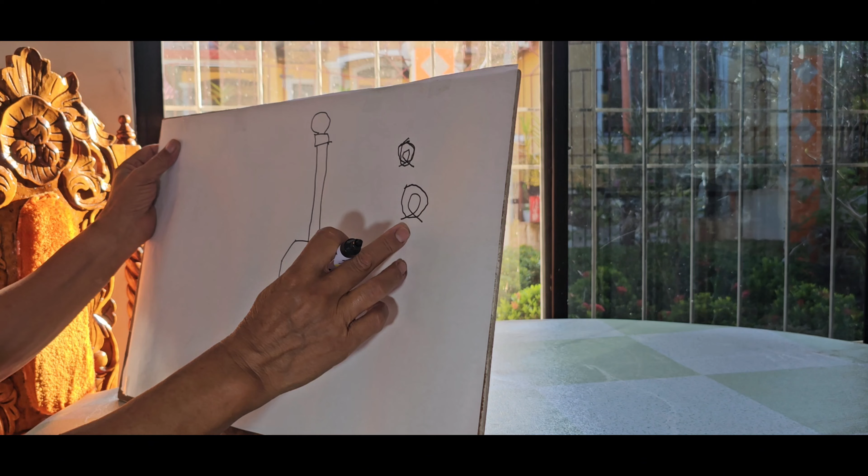Let's draw a bulb with two wires connected to it going to the junction box. This is the bulb. By the way, I used to draw the picture of the device for your easy understanding. In electrical plans, they do not draw this one. The bulb is drawn in a schematic symbol this way, a circle. This is the schematic symbol of the bulb in electrical plans. Then let's draw a switch.

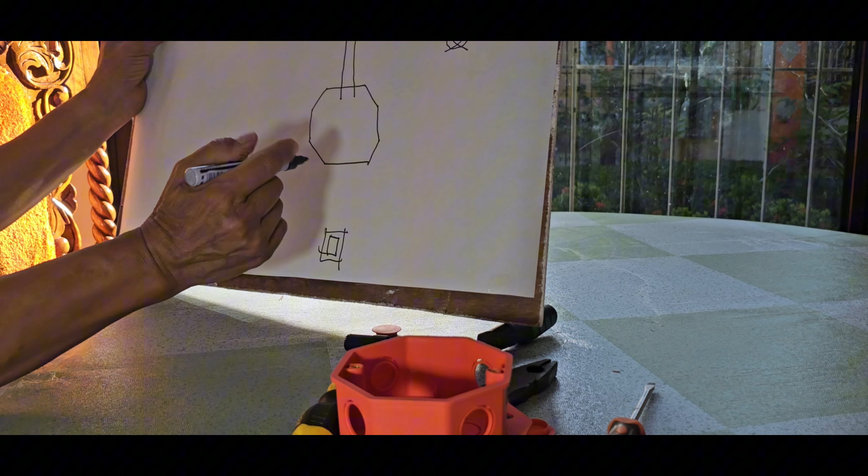Switch. This one, the switch. Then we have the wire going to the terminal of the switch. In electrical plans, they do not draw the switch this way. They just use the schematic symbol: a diagonal line, then a dot. This is the symbol of the switch in electrical plans.

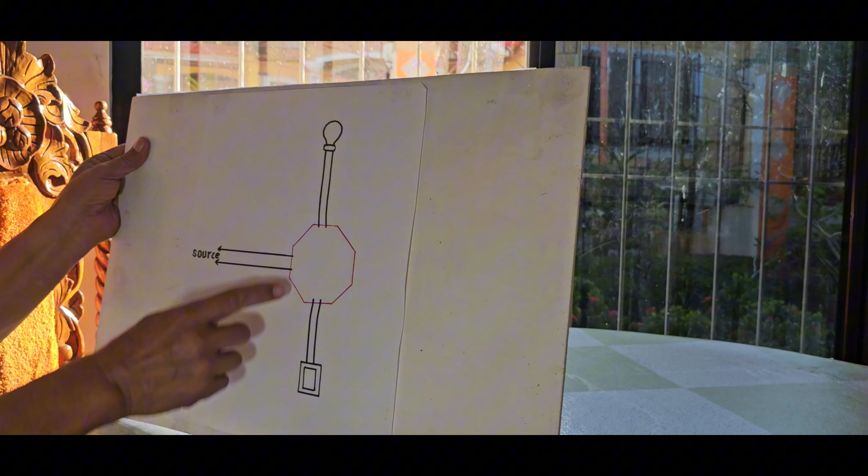Then we have the two wires going to the source. These two wires are to be connected to the source. So we have a bulb with two wires going to the junction box, the switch with two wires going to the junction box, and two wires to be connected to the source. Then how are we going to connect these wires in the junction box?

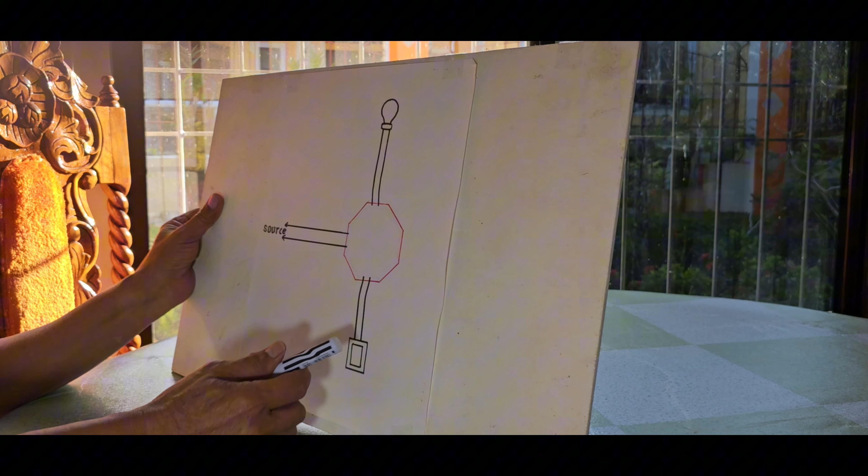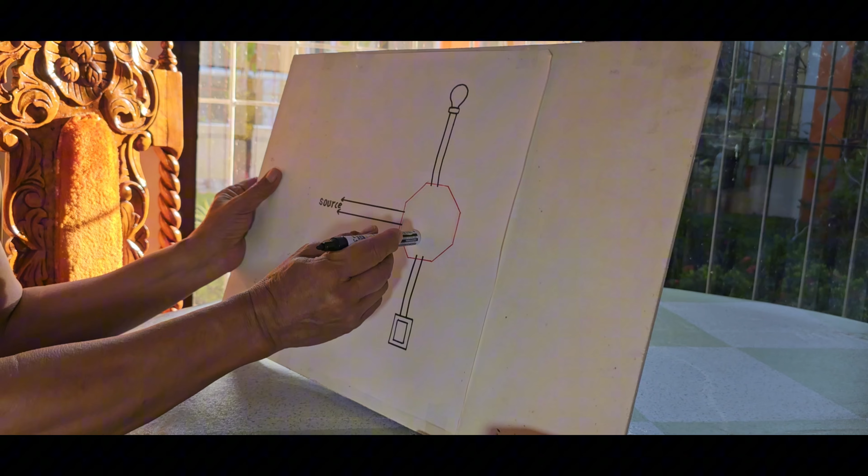To join the wires, we have to follow our motto, as we have in lesson 1. Connect one wire of the source to switch, then switch to the bulb, then the bulb and the source. Again, the motto says, connect one wire of the source to switch, switch to bulb, and bulb to the other line of the source. Let's do now the connection.

So connect one line of the source to switch. This one is the joint; we join it here. Then from the switch to the bulb: we connect this wire from the switch to another wire from the bulb, and we join at this point. Then connect the other line of the source to the other line of the bulb. The joint is here. So how many joints are there? We have 1, 2, 3.

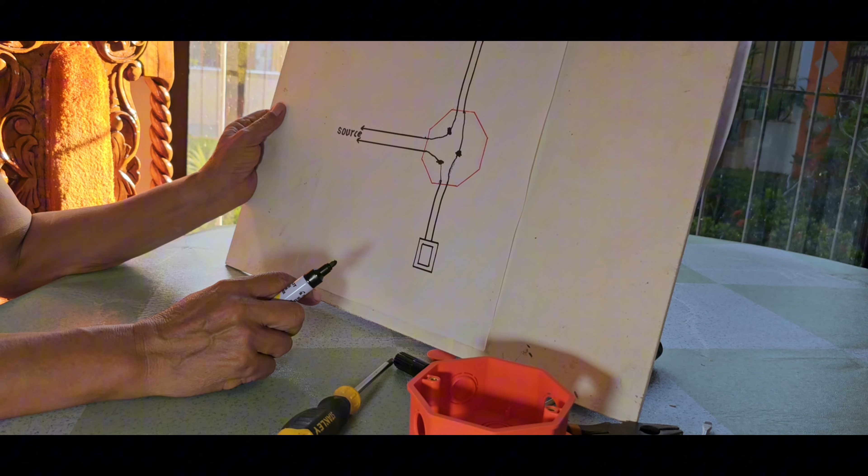Now we will make the actual circuit following the diagram. So we have here the junction box. Then we have here the bulb, with two wires coming from the socket. Then we'll cover this with this corrugated electrical tube. That is what is being done in the actual circuit.

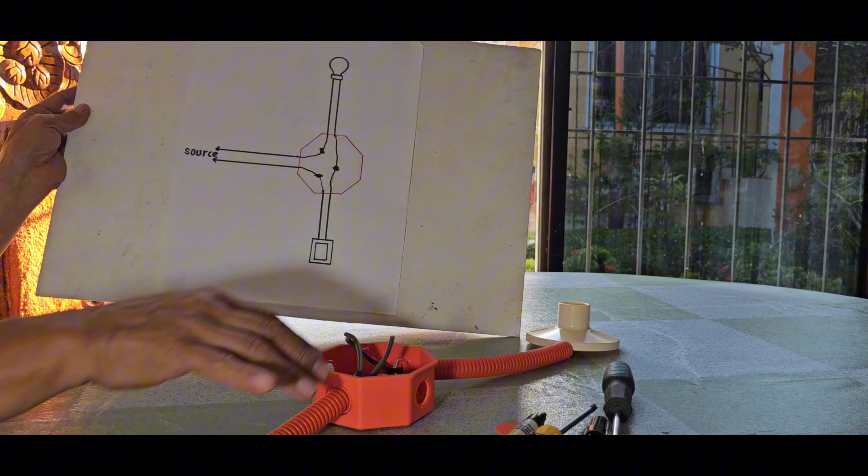Then we will connect the switch. I have shown you how to connect the wires to the switch. So we have two wires from the two terminals of the switch. Then we cover this with the corrugated electrical tube. So we have this now. Then we have this wire to the source. Okay, so how are we going to connect these wires? You follow our diagram.

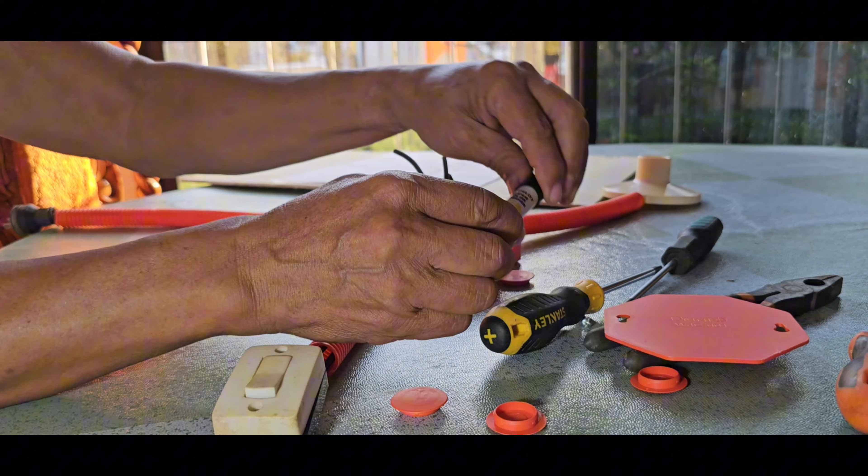So connect one line of the source to switch. Get one wire of the source, then another wire from the switch, and you join them. Before you connect, you have to cut first the insulator at the end. Then one wire from the source. We join or connect the two wires.

Then next, we connect the remaining wire from the switch and the other wire from the bulb. Cut first the insulator at the end. Then the wire from the bulb: take out the insulator at the end. Then you connect the two.

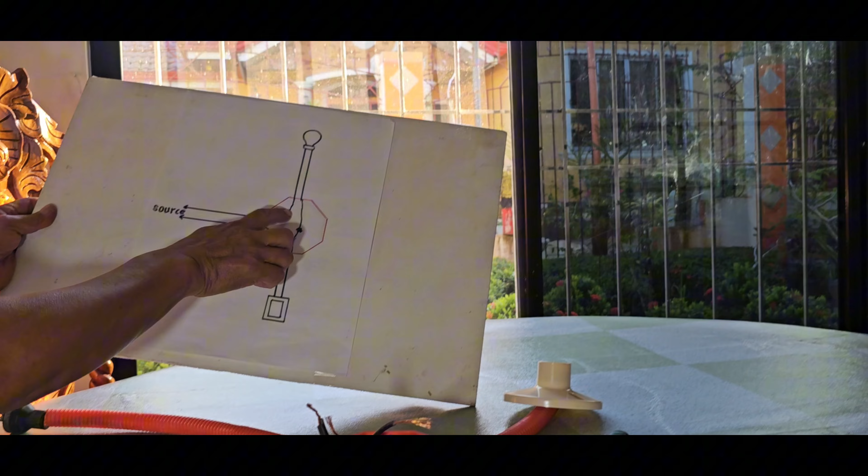So now one wire of the source is connected to one wire of the switch, and the remaining wire of the switch is connected to one wire of the bulb or the socket. Then the other wire of the source is connected to the bulb. So how many joints are there? 3. Now we cover each joint with tape to avoid short circuit.

Then another joint. Then another joint. Then you cover.

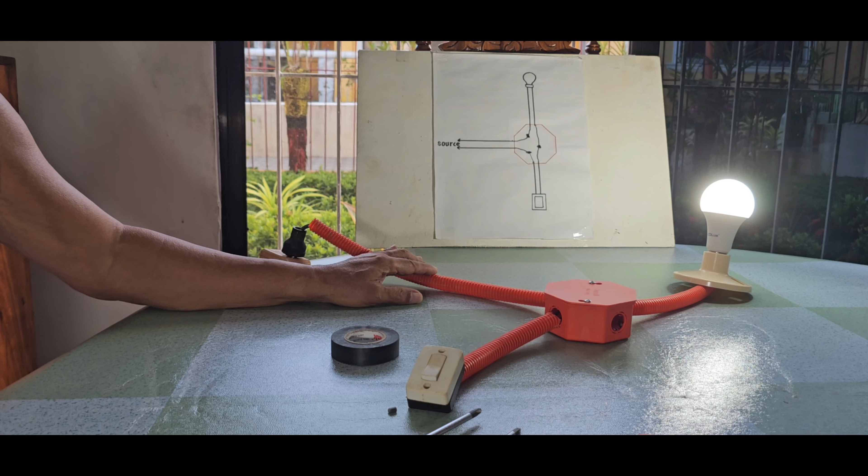Before we end, I have here self-test questions for you to answer. Number 1, how many joints are there inside the junction box? Number 2, draw a diagram of a basic circuit step by step with the joints in the junction box. If you answer the questions correctly, you can proceed to lesson 3. If not, go back to the lesson and find the answer.